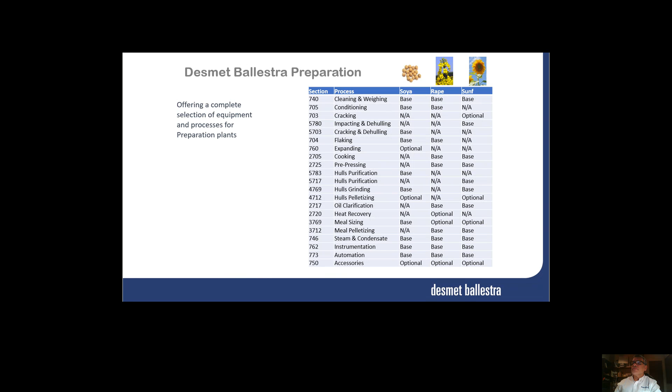I will show some of the sections, a few of them, including some of our special equipment in the cleaning and weighing. We can highlight the magnet, the impact aspirator in this case. This is the section whose purpose is to give a constant and clean seed flow to feed the prep plant, whatever it is. In this case, soya or rape is more or less the same, with some different parameters in each, but similar general setup.

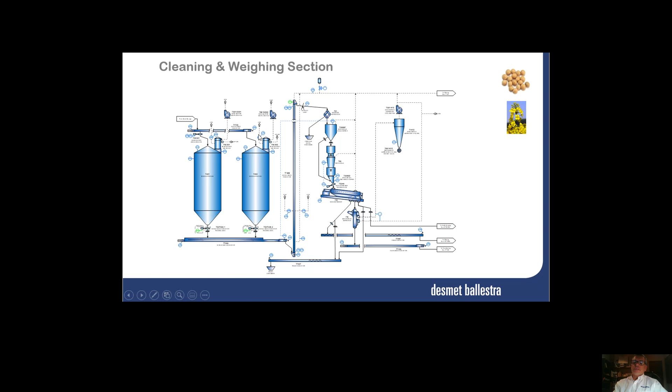One of the important points, as we shown before, is the magnet, which will prevent any ferrous materials from passing through to the entire preparation, among other things for safety issues, but also to avoid problems in the equipment that will receive any of these possible ferrous materials.

We call this a parallel cascade magnetic separator, where one of the cascades is working while the other one is discharging the metals or cleaning all the materials that were caught in that leg. For that purpose there is a flap that moves to one side or the other to blind one of the discharge legs, completely blind to avoid any material passing through at that time.

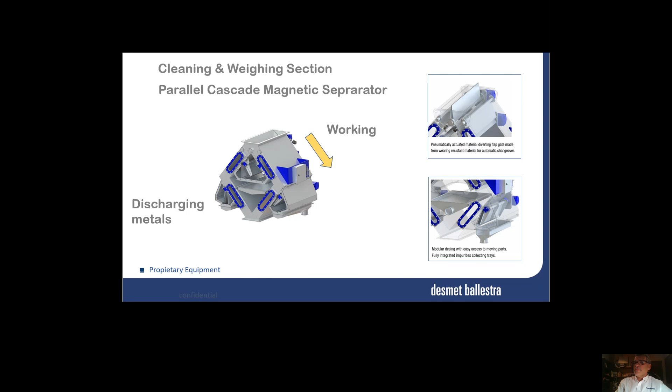Basically, it's the maximum separation effect with double pass over the magnetic plates. In every cascade there are two parts with a magnet, so it's the same material passing in front of two magnetic plates. It automatically changes over for cleaning operation without process flow interruption, so it's constant feeding, but working in the two possible ways.

It is a very powerful magnetic material, so it catches even small particles of material. It is fully self-cleaning. As you can see, there are a lot of pistons with the capability to sweep the material from one leg to the other, from one cascade to the other, but also to open every one of the magnetic plates to discharge the material that was caught on that plate.

Also, it's a dust-tight casing construction, reinforced carbon steel folded plates, which also are optional in stainless steel for a special material, or for much lower maintenance work. It has replaceable, wear-resistant protection on the parts which are in contact with the material, which, as said, naturally wears a lot, so it is very important to have a resistant material, while at the same time it is necessary to replace the wearing plate from time to time.

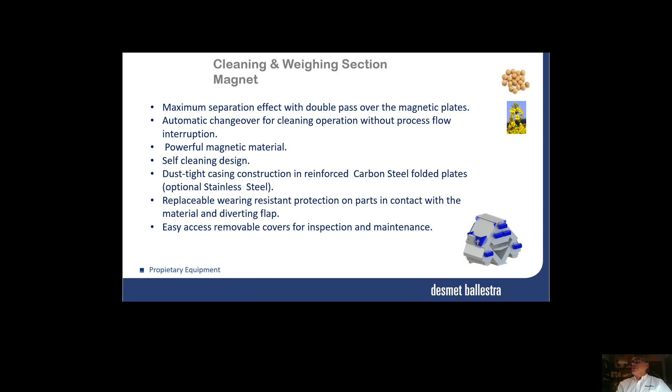Also there's an easy-access removable cover for inspection and maintenance. As well, in some of the parts of the equipment there are sight glasses to see inside the equipment, to check how it's working or if there is any potential obstruction in the equipment.

Here we can see the main dimensions, but I would point out as more important the height of the magnet, which is no more than 1.5 meters, 1 meter 400 millimeters, which is possible. It's easy to replace any of the existing rotating plates or any other.

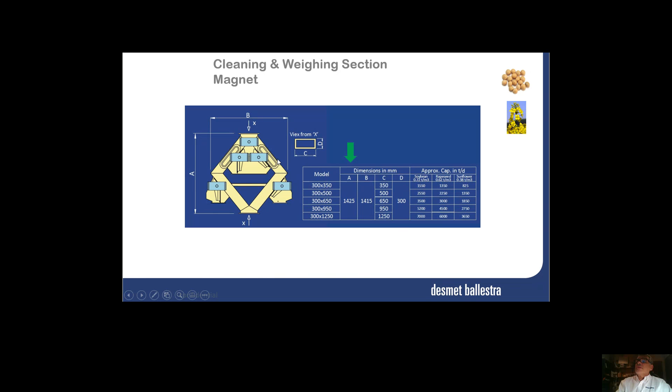Here you can see the sight glasses I mentioned for easy inspection, and all the capacities up to 7,000 tons per day material in the case of soya, but sunflower a little bit less, about half, because of the density, and 6,000 tons in the case of rapeseed. For most plants, one simple machine of this model is enough.

Now moving to the impact aspirator, tubular type. This is existing equipment in the market, but with some improvement into the design. It's one piece of equipment that is used in the pre-cleaning section, as we are talking right now, but it's also used in many other sections.

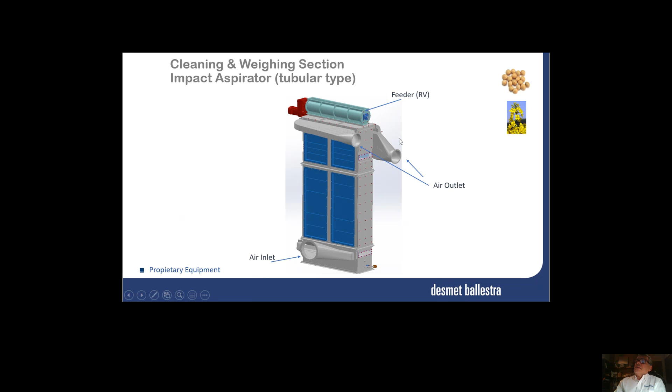Typically it's the feeder in the center, with an air inlet but two air outlets, so it's absolutely symmetrical in the air flow, with big inspection doors for easy maintenance, to clean up if some material came in wrong during pre-cleaning or screening, and also maintenance doors to change some of the tubes in case it's required due to wearing.

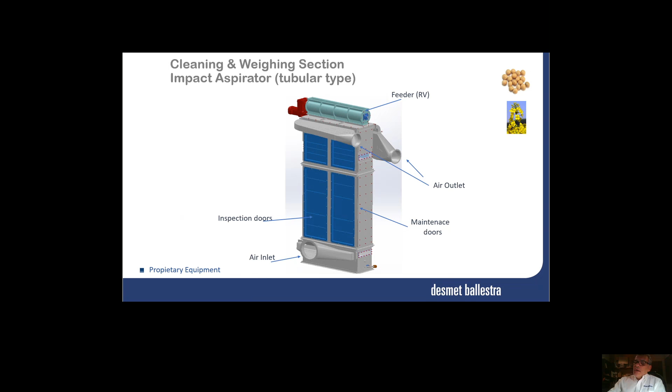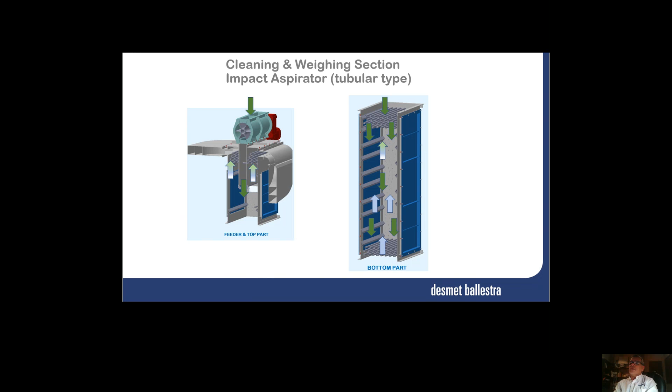This is how it looks inside with a countercurrent flow. The seed goes down, as can be seen in the green arrows, from the center all the time, bumping all the tubes down to the bottom. Meanwhile, the air goes upward until the top part, which is also divided in two, so it's absolutely symmetric all the way, both the seed and the air, which is the more important reason for the separation.

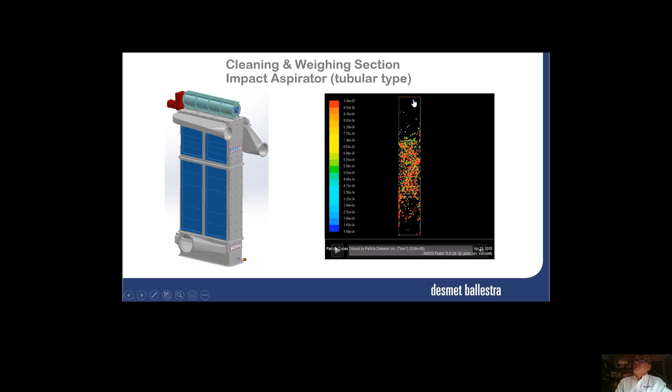This is a computational fluid dynamics demonstration of how it works. This equipment inside, as you can see, has all the tubes with some eccentric figures in the angles on the walls to make a better distribution. You can see here all the blue parts, which are the lighter parts that are being removed, while the heaviest parts are going down.

So this is existing equipment in the market, but with a little upgrade.

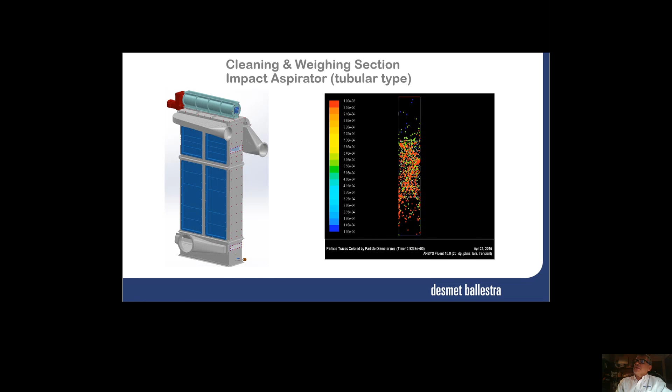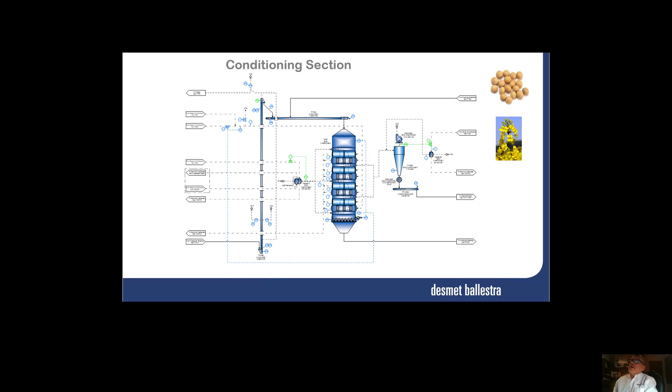About seed conditioning, which is the most important piece of equipment in the conditioning section - this is the vertical seed conditioner, or what we call the plug flow seed conditioner, which is basically oval tube modules with steam inside, which gives the process of drying and heating to the incoming seed from storage.

Basically, the main difference in our case, and the newest part, is the discharge. It's what we call pendulum discharge. We will see some details of that in the next slides.

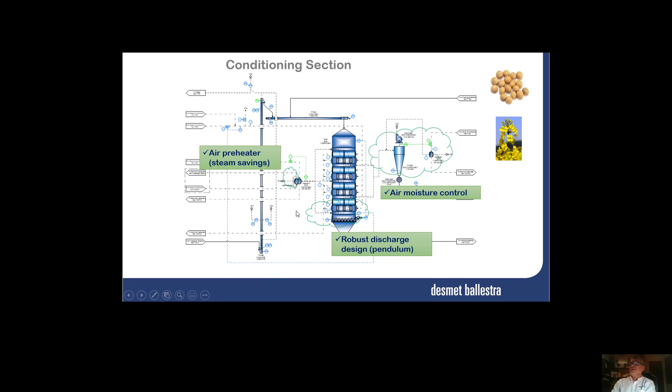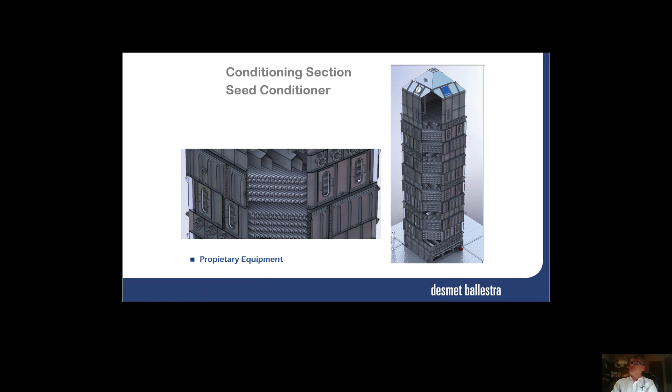Also a process upgrade: there's air moisture control of the air outlet, the steam air outlet from the conditioner, as well as some air preheating and steam savings in an air preheater using condensate from the same equipment. As you know, these are the tubular modules, oval tubes, with all the inlet and outlet modules of air, giving an excellent air distribution all across the width of the equipment.

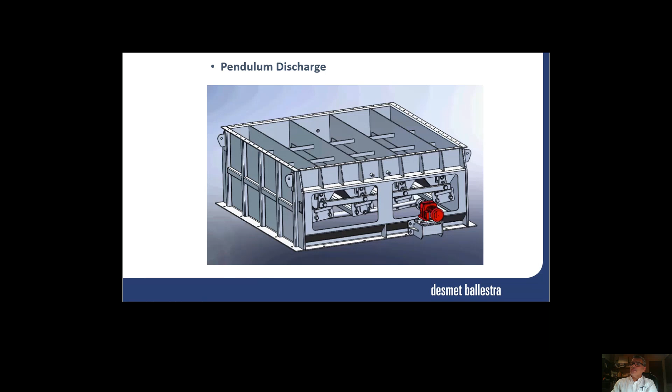As we mentioned before, this is the pendulum discharge. This is how it looks outside, without the cover naturally, but this is basically how it works.

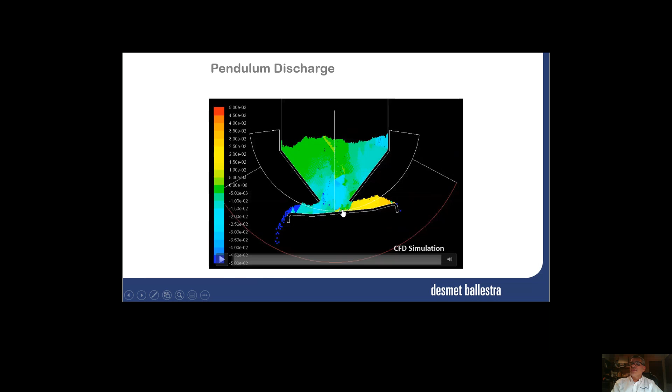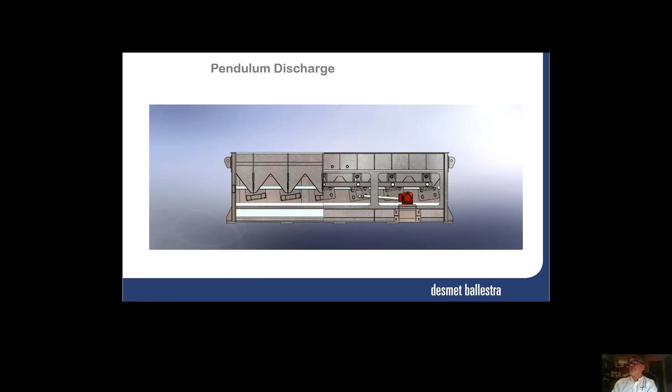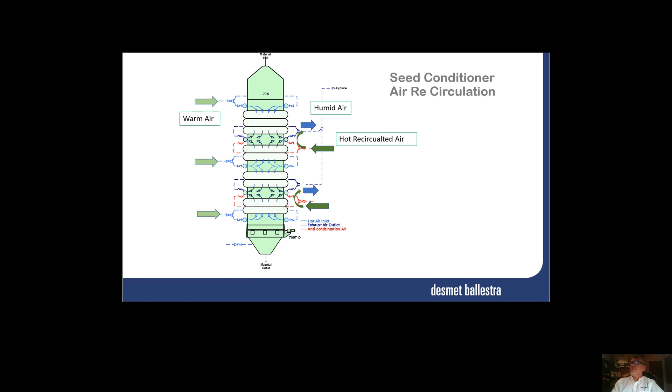From the point of view of the process, the seed conditioner has some air recirculation at the outlet. This is the warm air preheated in the air preheater, which typically has 3 inlets but 2 outlets, of humid air with some hot recirculated air to minimize any condensation of product into the outlet part. So by measuring the relative moisture at the outlet, we can modify the temperature of some auxiliary air feeding all the ducts coming out from the equipment.

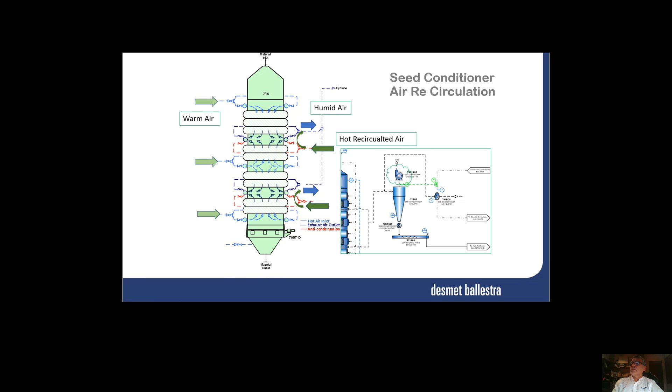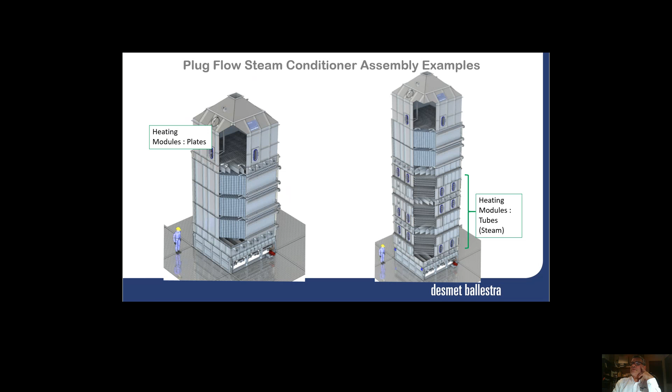So it's all the time with clean ducts. This is how it looks like from outside, and in some cases where there is some heat to be recovered with a water loop, it's possible to

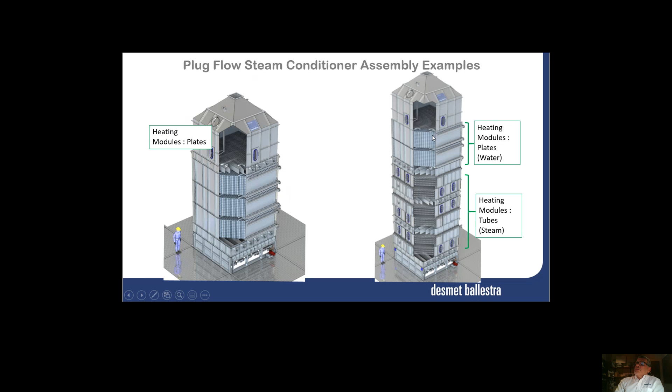preheat within these plate modules on the top. It's possible to preheat the material with a lot of savings typically.

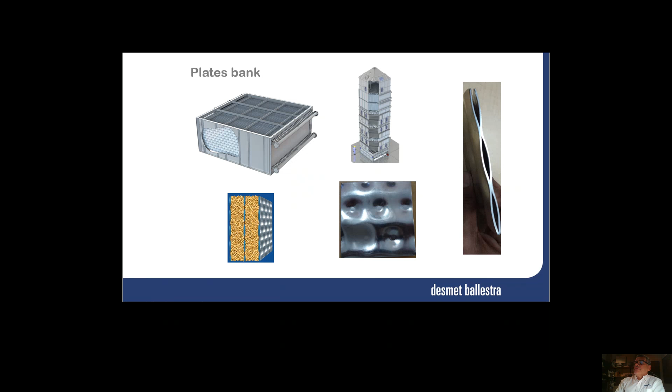This is how it looks like, the plate banks, with a special design of the plate where the seed goes outside and the water inside. It's not possible to use tubes in this case because the heat is not well transmitted that way.

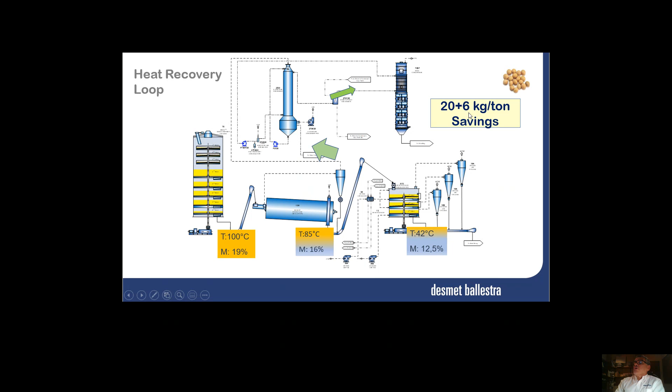We even have some applications in soya, for example, or rapeseed as well, where we are taking the heat from meal drying that is given at the end to the soya incoming, as a preheating, where the savings can be up to 26 kilos per ton. So it's a big saving in this case.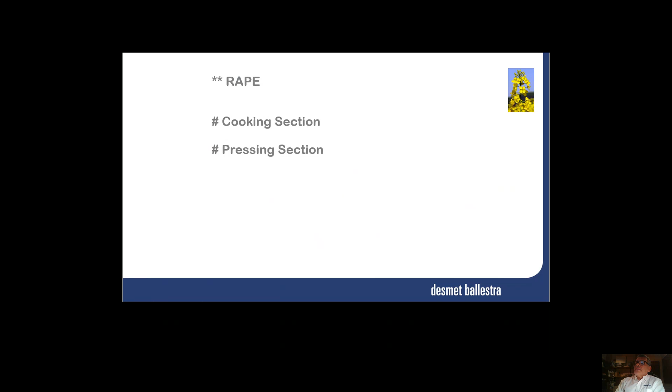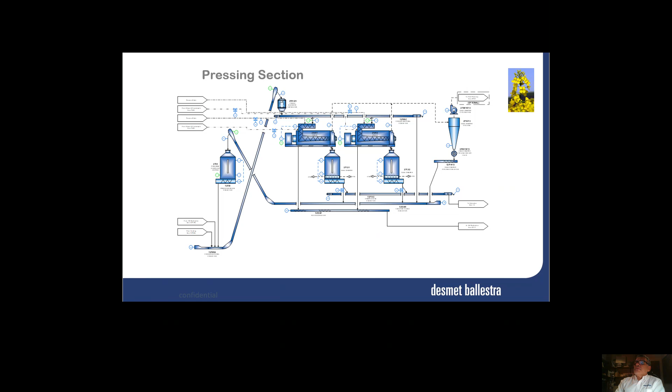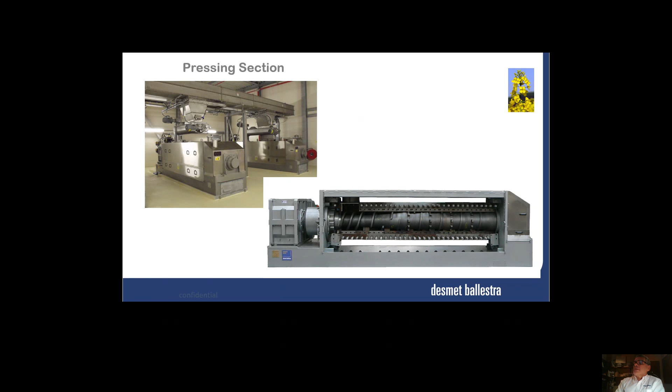Going specifically to the rape, the cooking section and pressing, we will show specifically. This is our flow sheet for pressing, but the interesting point we want to mention, some news in the market, is our press, the Rosedown, our sister company, the Sterling 900. So we now have an equipment to process in a single unit 900 tons per day of sunflower or rapeseed.

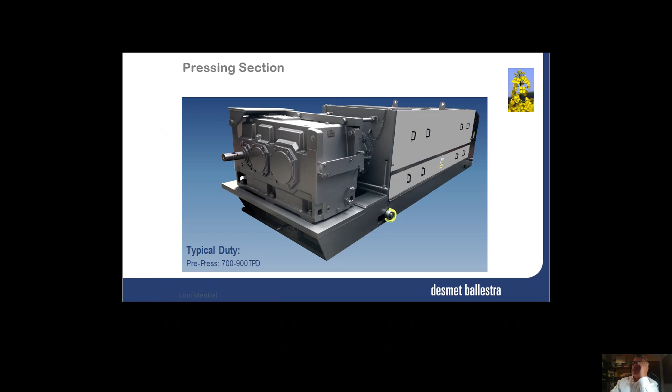Mechanically, it reduces maintenance due to the drainage cage being fully open by 2 halves, completely horizontal, so it's much easier to do any maintenance of the machine in that position.

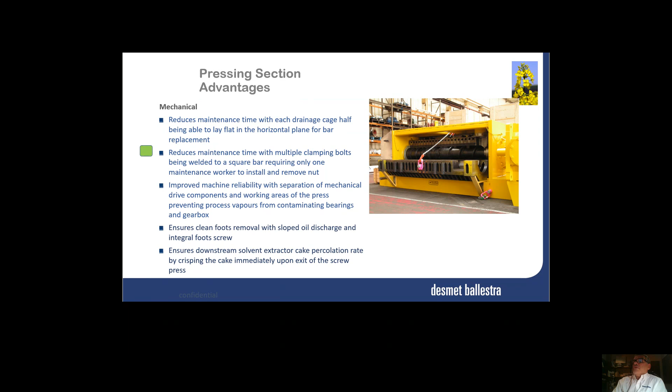It also reduces maintenance time through multiple clamping bolts, where a single man can make all the replacement of all the connections of the cages.

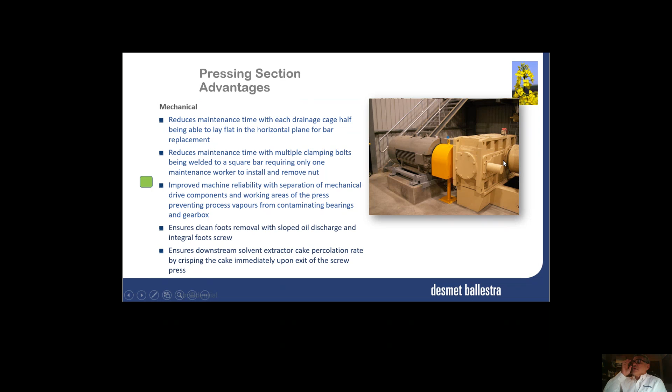Also, it improves machine reliability by mechanically separating the drive, motors, gear box, and machine. You can see that it's completely separate, so much less maintenance is required if there is any exit of steam, which happens from time to time.

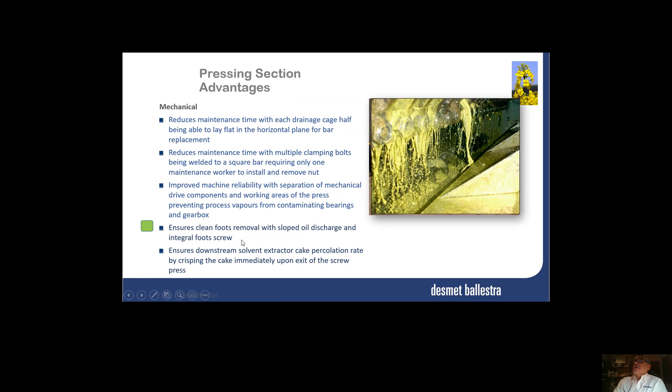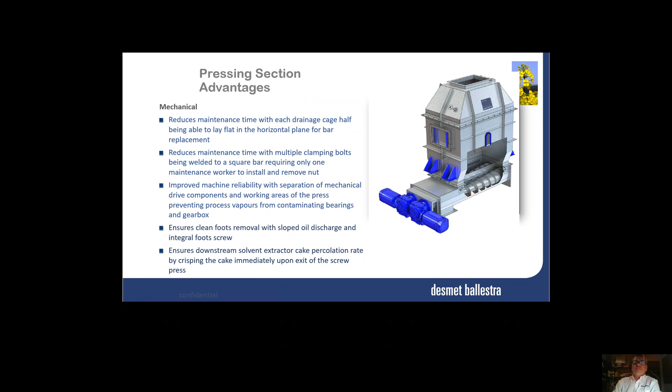It also ensures clean foots removal with a sloped oil discharge and integral foots screw, as can be seen in this picture. It also ensures downstream solvent extractor cake percolation rate by crisping the cake immediately upon exit of the screw press. This equipment is what we call the cake crisper, another upgrade in this process. This is the press that discharges, instead of onto a cake conveyor, directly onto the cake crisper.

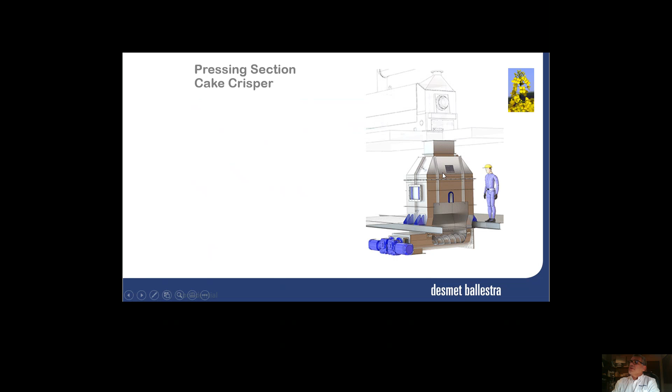So it's immediate structuring of the cakes, with a countercurrent cooler using air aspirated from the top of the press, so it's immediately cooled down and made much more solid, the cake, which is very fragile when exiting the screw press and subject to disintegrate into fines.

By gentle handling of the cake under moderate aspiration, in the first minute after discharge from the press, the cake protein structure becomes crisped and provides a durable cake ready for conveying to extraction.

These are the main features of this system: it's fully integrated with the press to eliminate intermediate conveyance, with countercurrent aspiration, airflow from the cake crisper up through the press discharge, to immediately remove surface moisture and minimize airflow.

Because of the temperature, it's not required to be so low to be transported to the extraction plant. We use much less air, 3 to 4 times less compared to traditional cake coolers, which also makes much less odors and less downstream treatment compared to traditional coolers.

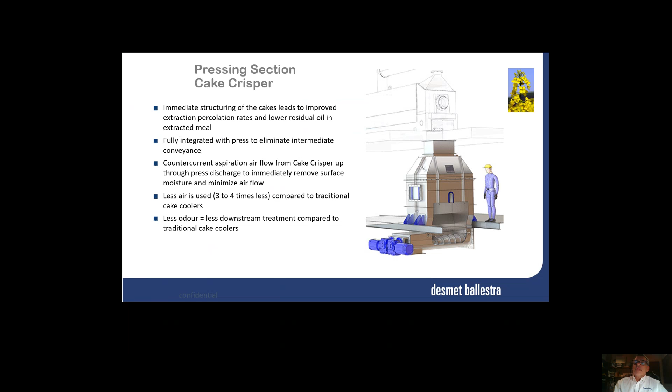So this is another view with the discharge screws, which you can see are completely different in pass and volume at every pitch of the discharge screw.

This gives the possibility of piston flow discharging, with the ambient air coming from the bottom fully countercurrent to the discharge of the press and the hot vapor outlet, so the air passes all through the material, through the cakes discharging from the press. So this is a very interesting equipment to minimize the potential problems with powder in the extractor.

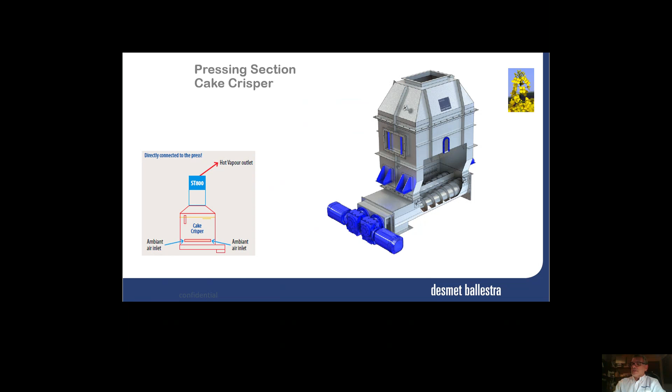So this is all in this presentation. Thank you very much for your time.